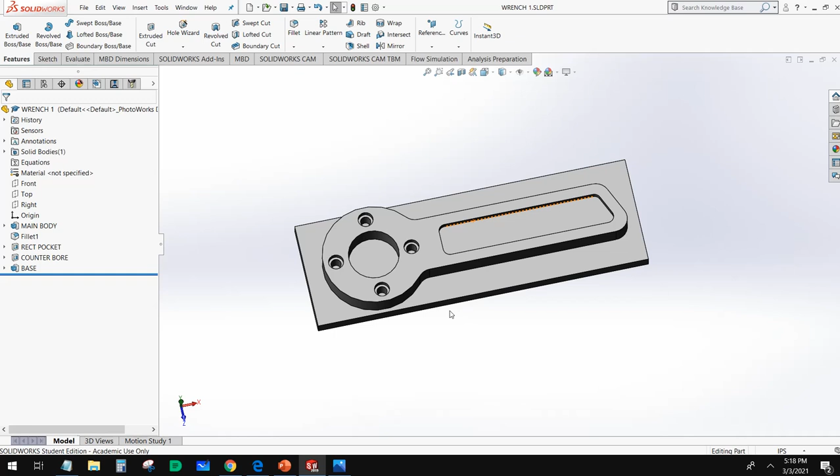And then this is what we're going to be left with, right? We're going to chuck this up in our mill, and it's going to cut this part out for us. Now this part, we call it a wrench. This is just a representation of a part. It's a pretty good analogous part for other parts that you may want to mill, like race car parts or aircraft parts, right? So we're going to cover how to write the toolpath for this, and then we're going to be left with this pedestal here that we're going to have to remove.

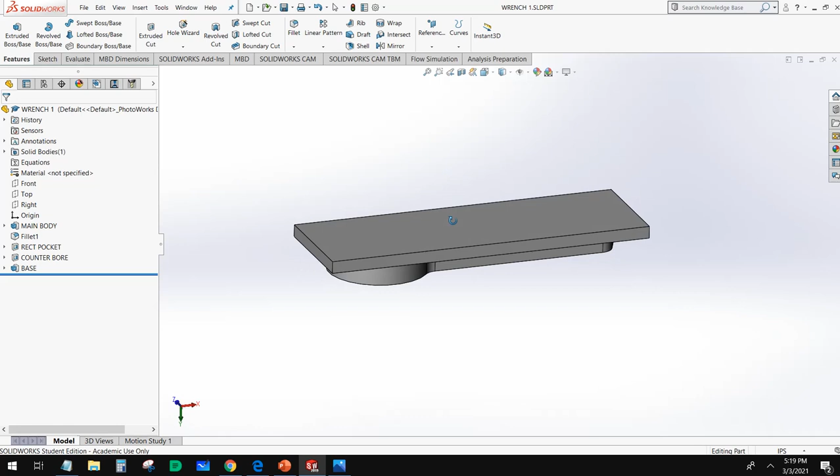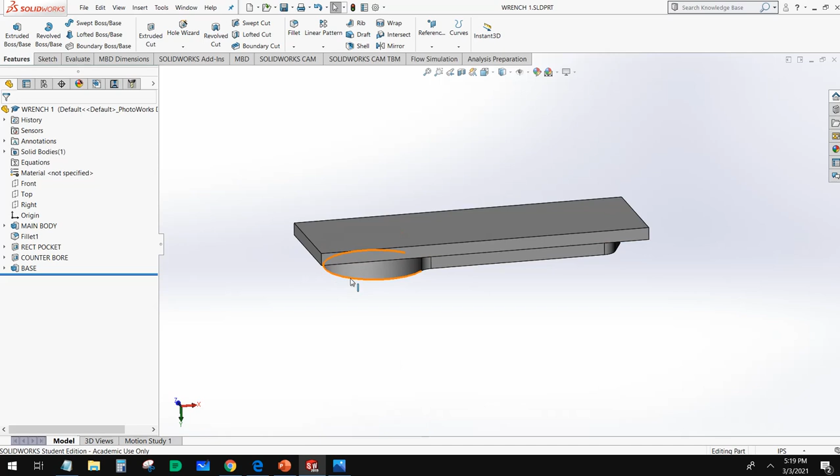Now, the way we would do this would be to flip this part over, chuck it in the mill, and then face this off. The issue we're going to run into is we can't really chuck this effectively in the mill. So what we're going to do is create a set of soft jaws. In the lab, we've already gone through the beginning part of this. But what we have to do for the soft jaws is machine in a pocket to accept this. That way we're not crimping or deforming this shape at all.

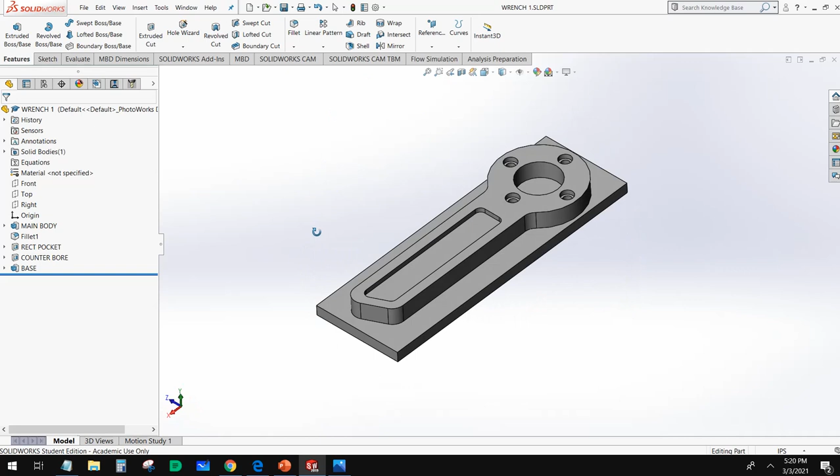So we're going to go over how we generate that pocket, how we write the programming, and how we're going to execute that in the mills. But for right now, let's go ahead and set up the tool table for this. I'm going to give you guys this part. You can check on Brightspace for this. We're going to start this like we normally do. We're going to go to SolidWorks CAM and we're going to define the machine.

Now, we're going to come to this screen here. We're going to choose mill inches, and then we're going to go to tool crib. And if you see down here, we should see several tool cribs. Tool crib 1, 2, 3. What we're going to do is just choose one. Select that. And if you have tools in here, just use the remove tool function to remove those. We want a blank tool table. I've got a blank one here, so I'm going to go ahead and do this.

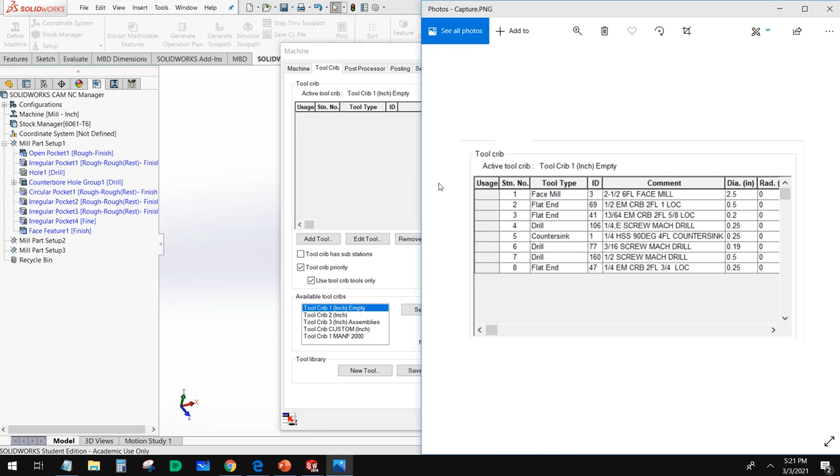Now, the tools that we're going to be loading, right, this is from our tool index that we have in the mill. So we've got our face mill, our flat end mills, our drill, countersinking tool, some more drills, and another flat end mill. We're going to add these in one at a time. So we're going to add this 2.5-inch face mill first. So we're going to go to Add Tool.

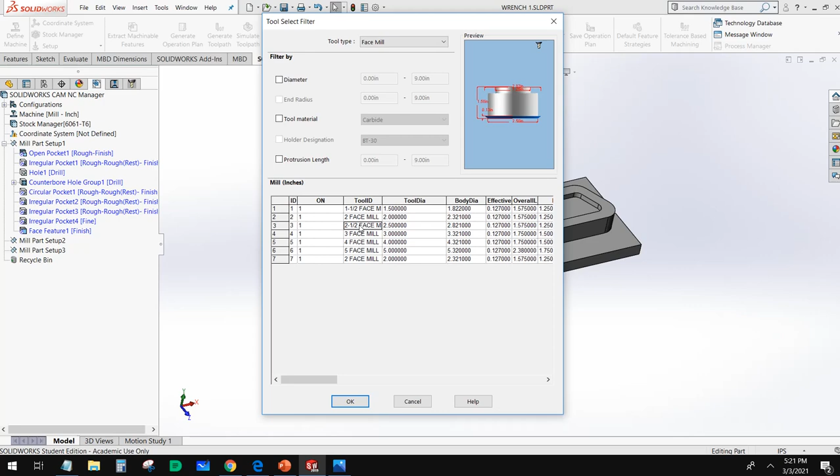This is going to pop up with our tool selector. What we want to do is select Tool Type to Face Mill. We have a few different options here. We're going to choose the one called 2.5-inch face mill, and OK. And that'll pop up here, face mill, 2.5 inches.

We're going to repeat this for our full range of tools here. We're next going to load in our 1/2-inch 2 flute end mill. We're going to go to Add Tool. We're going to choose End Mill, Flat End. And this is going to list all of them, right, and pretty much every common size. If you're looking for a specific size, you can filter by diameter and set that to 1/2 inch. And then it will pop up with everything from 1/2 inch on up.

Now pay attention to the number of flutes. These are all carbide tools. Like I said in previous videos, that's not going to matter, but we do want to pay attention to the flutes, and we're going to choose the 2 flute option. We've got our second one in there.

Next is our (13/64) 2 flute end mill. This should be 3/16. So we're going to go ahead and make sure that this is 3/16. Let's see. Add tool. Another flat end mill. We're going to scroll down. 3/8. 3/16 2 flute end mill. I'm going to go ahead and click OK.

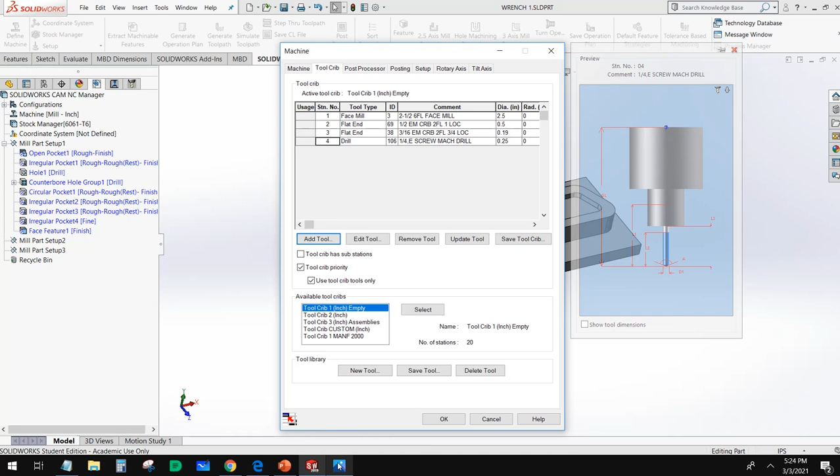Our countersink tool. This is that 90-degree countersink. That's also a 1/4 inch. Our 3/16 and 1/2 inch drills.

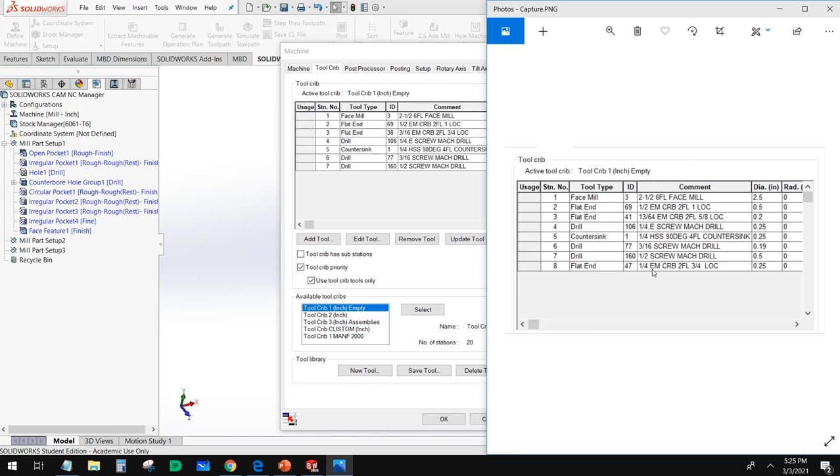And our last tool, which is going to be that 1/4 inch end mill. Make sure you select the 2 flute option. All right, and here we have our complete tool table. So this mimics exactly what we have in the lab. So this way we know that when we go ahead and generate our tool paths, we have an accompanying tool for that.

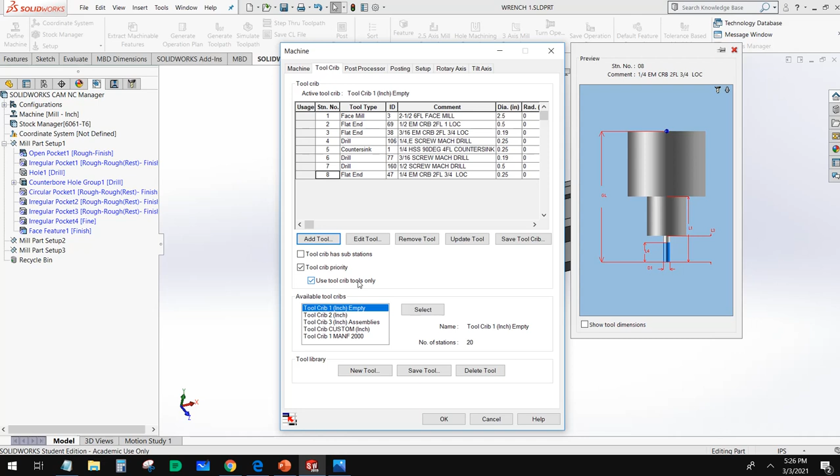Now this is important. Make sure you select Use Tool Crib Tools Only. If you don't have this selected, when you go ahead and generate tool paths, it will use the best tool for the job, or what it thinks is the best tool for the job. If you select Use Tool Crib Tools Only, it's going to generate the tool paths using only what we have available. So we want to make sure we have that selected.

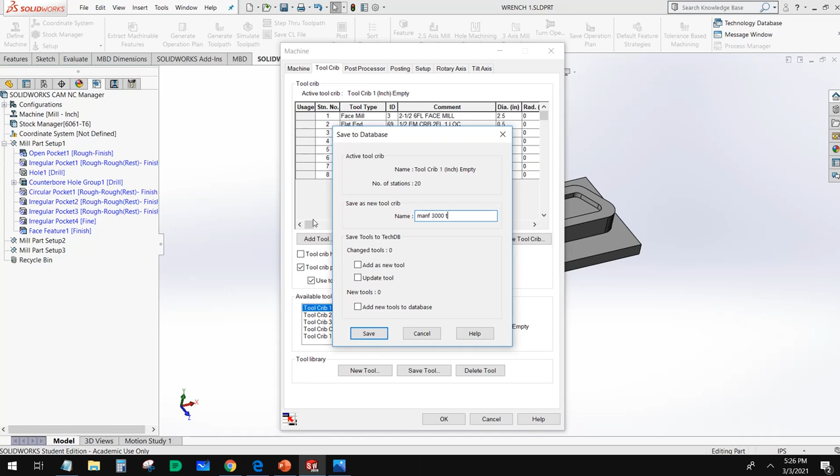We're then going to go ahead and save Tool Crib. And we can save this as whatever we feel like saving. Manufacturing 3000 tool crib. And we can go ahead and save that. Now that's going to go ahead and save into our available tool crib. So next time when we go ahead and define machine, we're going to go to tool crib. We're going to select the tool crib that we want and select, and then we can go ahead and click OK.

So I'm going to go ahead and end this video here. In the next video, we're going to go through and generate the tool paths to cut this wrench. And then in the video after that, we're going to go ahead and actually generate a set of soft jaws to cut this.